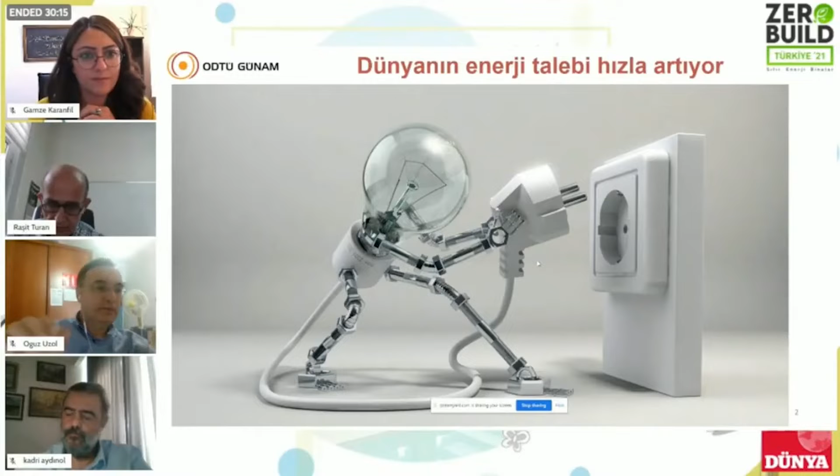The energy demand in Turkey and in the world, and also the supply of that demand. I'll tell you the place of solar energy, and then I'll talk about the technology part following that.

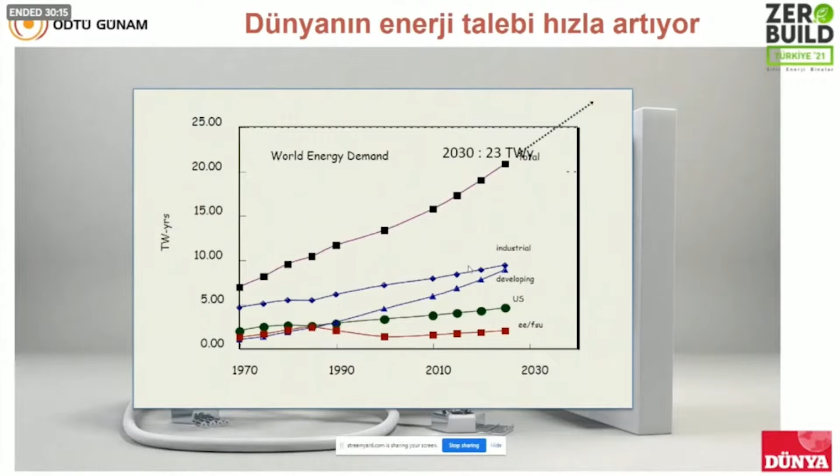The energy demand of the world is ever increasing, and we see that we use more and more energy, more electricity, and we drive more. This increasing energy demand is a problem, and because of it there are many problems: regarding climate, economic problems, and also issues about the future, peace, and the existence of the world.

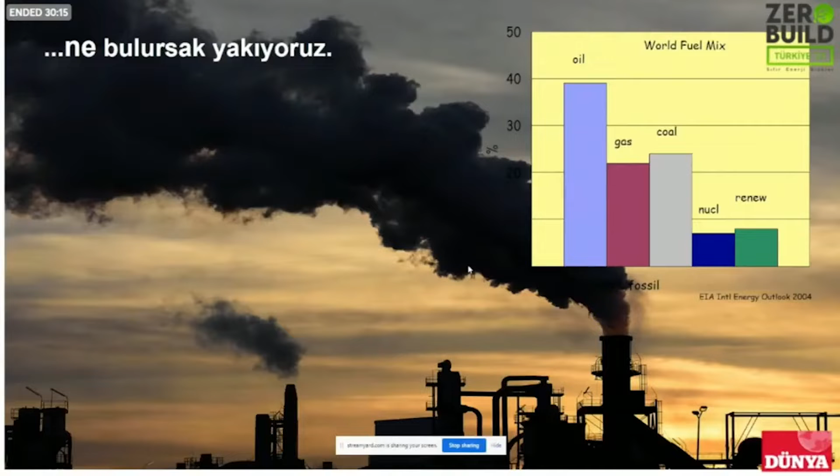There are a lot of problems in this regard, and I'd like to touch upon some of these. The world actually covers its energy demand through fossil fuels. As you can see on the right-hand side, there is petrol, oil, gas, and coal. They cover 80% of the energy demand of the world, and of course there is a need for, and an increasing use of, renewable energy resources.

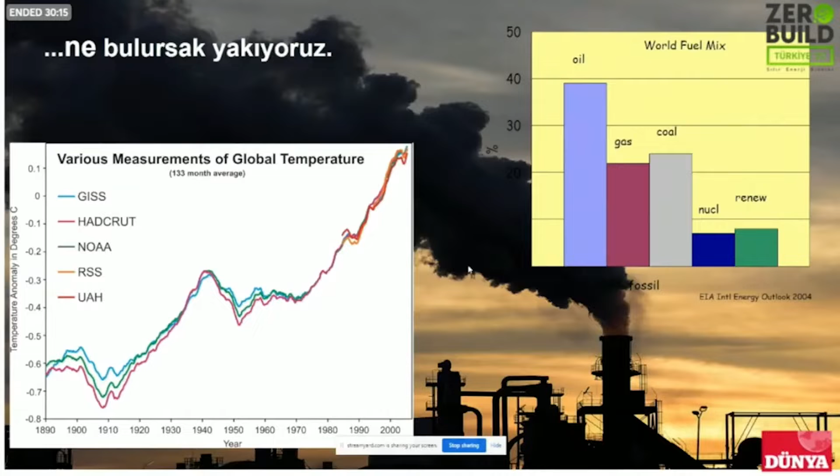Drought and aridity is something that awaits us, and for our country there is a huge danger of drought.

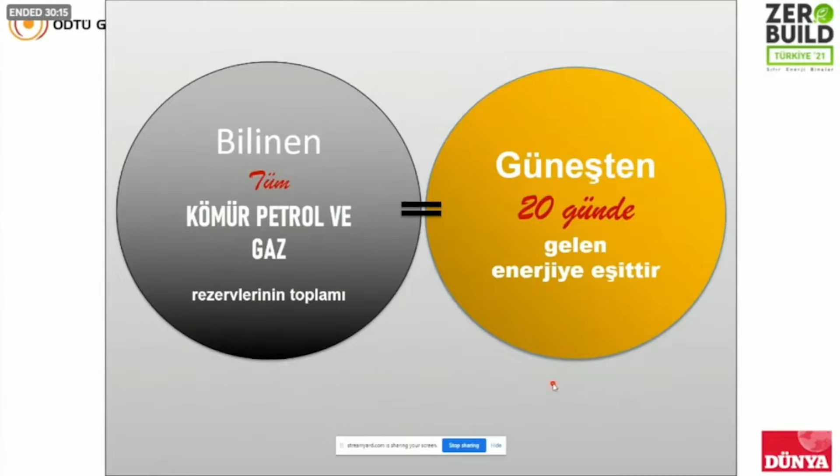So this is a very good analogy. All the coal, oil, and gas total is equal to 20 days of sun rays coming from the sun. So we can say that the sun, solar energy, is a clean and infinite energy.

When we say energy, what we have to think of is the cost of electricity energy, because for all the sectors this is the main parameter. It is the energy cost. We say it is a levelized cost of electricity in terms of electricity.

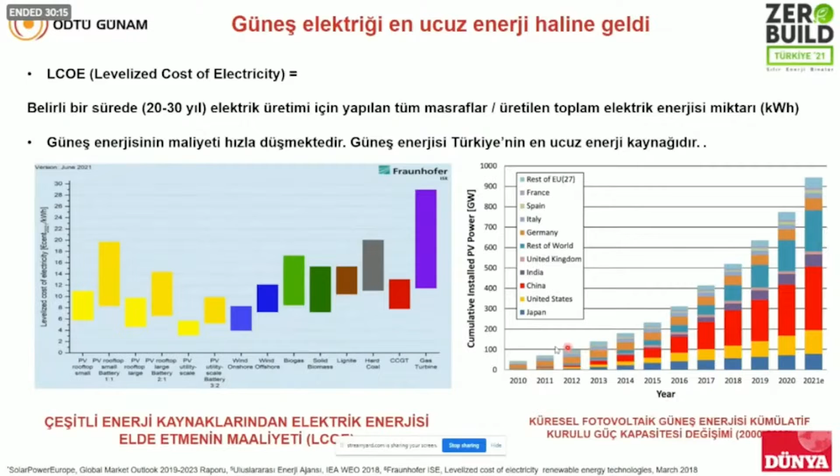The solar energy is a very cheap energy, as you can see from another indicator. In the international markets, there are tenders, international tenders. One was conducted in 2021 in Saudi Arabia. Saudi Arabia's second PV tender drew a world record low bid of 1 cent per kilowatt hour. It's a very low cost, almost free of charge right now.

And in Turkey, last year, a few months ago, there was a new tender and the price was 2 cents per kilowatt hour. To make a comparison, for the Akkuyu nuclear power plant it is 12 cents, so we can say 6 folds of the figure that you see here, and this is going to be paid for 15 years.

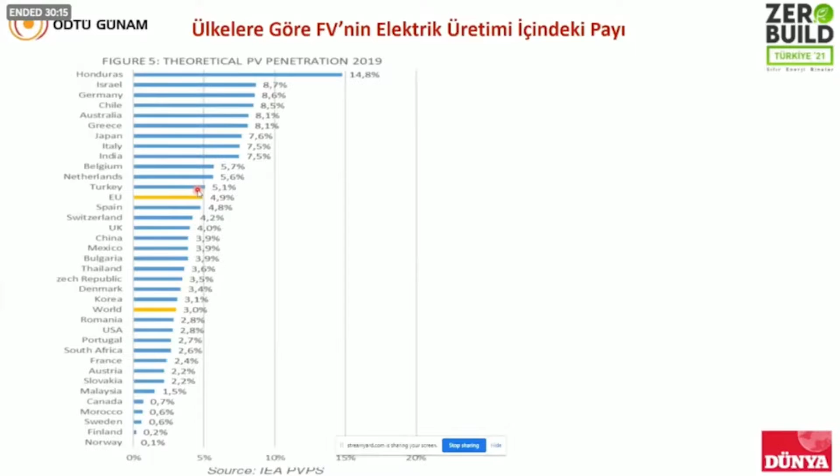It is now 5.1% in Turkey for solar energy, for the solar energy cost. The total PV photovoltaic capacity is 7,300 megawatts, and we can say that it means 11.7 terawatt hours per year. We can say it is 4% among all the other costs of energy.

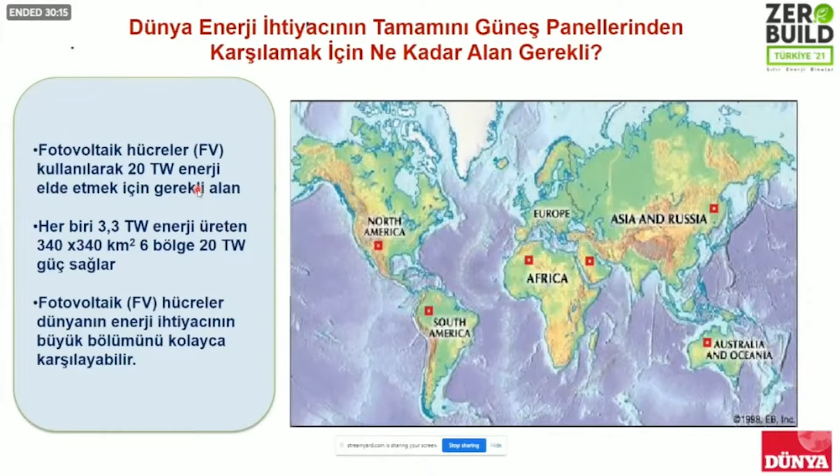In Turkey and in the world, when we make a calculation, covering such a land, you can produce all the electricity energy demand of Turkey with the power plants installed. So we can say the area is not as large as you think, and of course the roofs have a potential - coating these roofs will create an important potential.

So we can say that solar energy is clean, infinite, motionless, silent, not owned by anyone, and accessible, flexible, and a cheap alternative. We believe there are some observations about this solar energy, that it will be an important energy type, and it will increase. It is on the increase, and it will increase even more and increase its share even more.

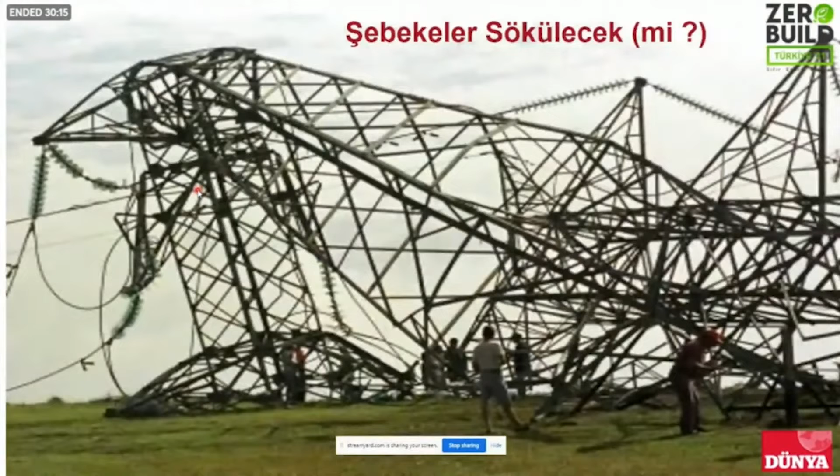As a result, the grids and the networks will be eliminated in the future. There will not be huge grids and networks.

So there will be for small communities, we will use smaller ones, and this is an important advantage. We don't have to transport energy from one place to another. So in the speeches, there were some speeches about the sun, solar energy, wind energy, and the storage of this. When you gather these together, you don't have to have big dams actually.

Ahmet Zaki Yamani, he was a very popular minister. I'd like to quote from him: 'The stone age did not end for lack of stone. The oil age will end long before the world runs out of oil.' This is a saying from years ago, and it's about how we can expect that oil wells will be closed because of lack of demand in the future.

We don't think this is a dream, and of course the European Union and the developed countries - when you look at the Paris Convention and similar applications, there is progress in this regard, and in the European Union and other countries, the use of fossil fuels decreases. For example, the European Union by 2030 will close down all the coal power plants. So I'll talk about economy and politics, and I'll talk about the technology.

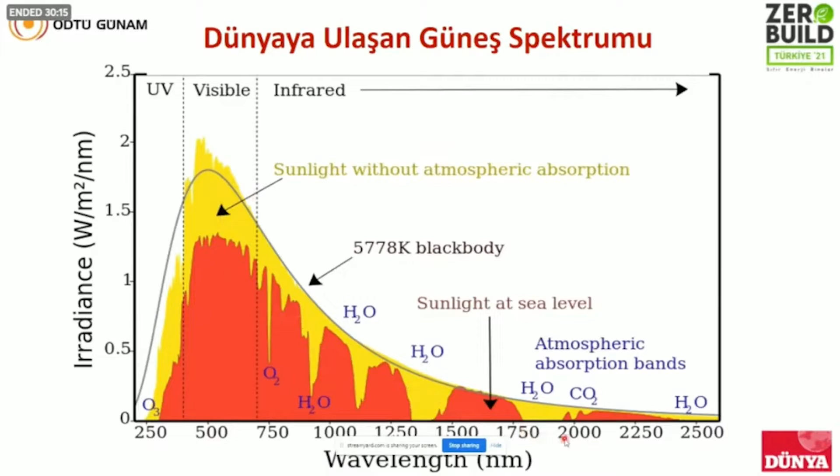You can use photovoltaic systems, as you can see, or you can see focused heat solar systems. There are two systems that you can have electricity out of solar energy: parabolic ones or tower type ones. In photovoltaics, there are some applications, and there are flexible applications as well.

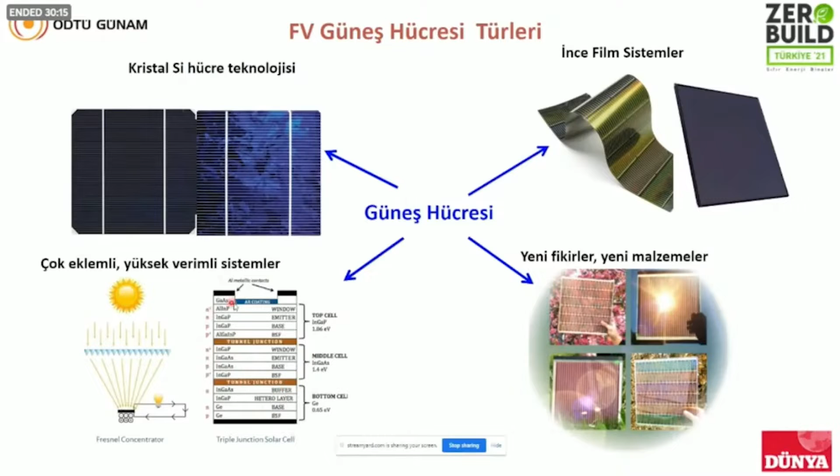When you look at the photovoltaic systems, there are different technologies, and there are 4 main areas. We see crystal ones, and you can see the other ones, and this goes up to 40%. It increases, and there are new opinions. When you look at the market share, you can see crystal silicon, and it says it is more than 95% - it is written wrong here.

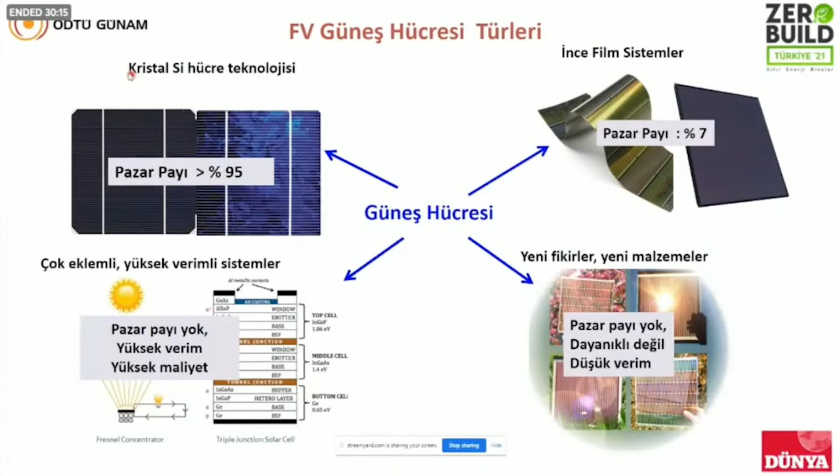The others are more efficient, but they don't have a huge market share because of the cost. The cost is a very important factor here for crystal silicium technologies. We can say that it covers all of the markets right now in the world, and in Turkey the panels used come from crystal silicium materials.

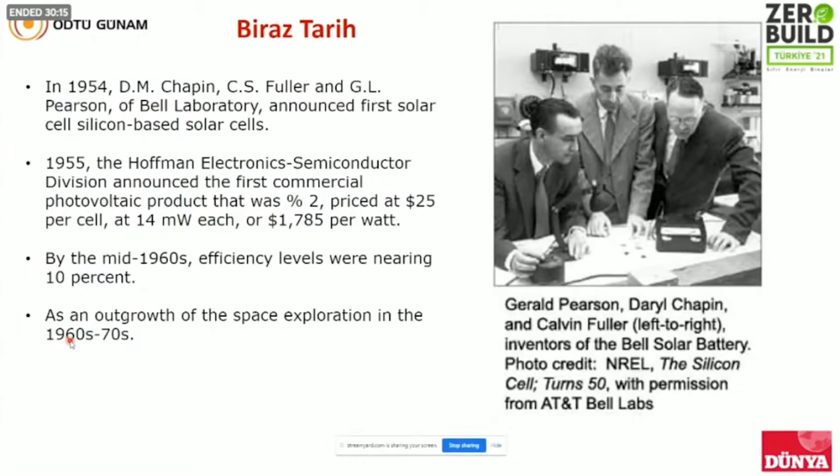In 1954, this was first found at Bell Laboratories. And when it was first found out, the efficiency was 2%, and it was priced very high. However, it started being used with satellites in space, and it's also an outgrowth of space exploration in the upcoming years.

A photovoltaic cell, a solar cell, is actually different from other energy producers because it doesn't have a mobility structure - it is a stationary structure in a plate. You can use a part of this for different electronic properties, and the other part for different properties and characteristics. The electrons absorb the energy and they turn. It's like water coming from a dam, pumped to one part, and it flows out, and here there is electricity current.

We call it a photovoltaic solar cell. You see a cell produced - they are 0.5 to 1 volt current, and you can gather as many as possible, and you can have large or small scale plants. It is a motionless and silent system, and it is differentiated from the other energy resources.

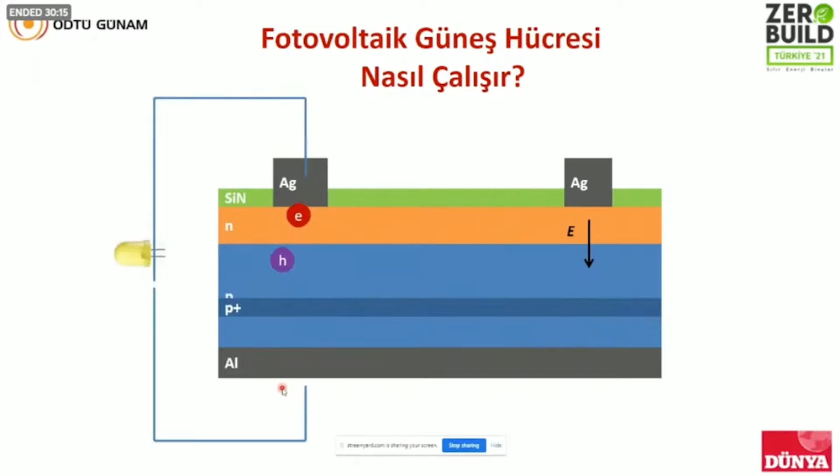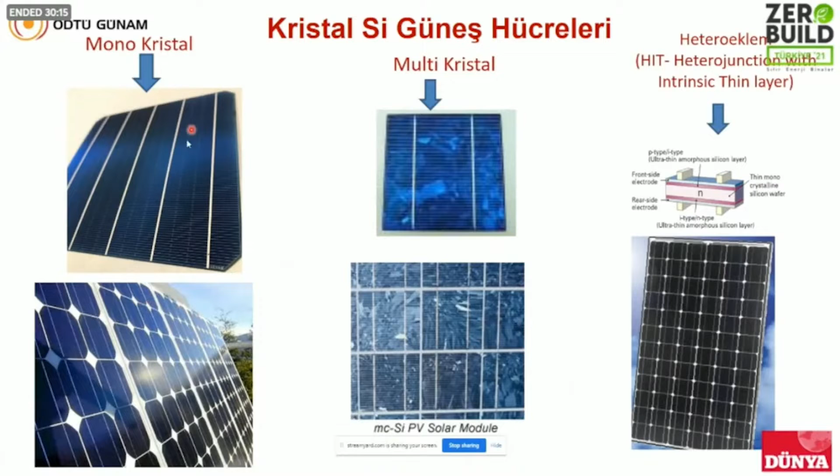Electrons are on one side, and they are the outflow of the material. There are crystal silicium solar cells - monocrystal, multicrystal, and heterojunction. I don't want to go into details, but some of them are more efficient, and there are different technologies and different aspects. In the films, for example, they can be transparent, and in terms of construction technologies, there could be some interesting applications.

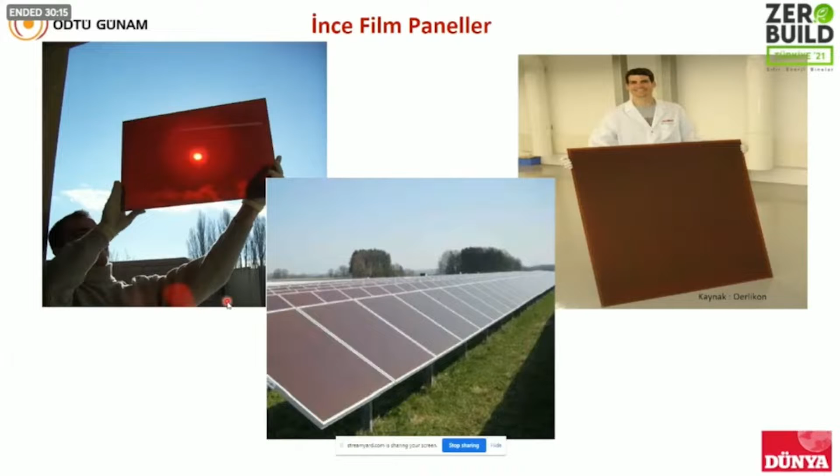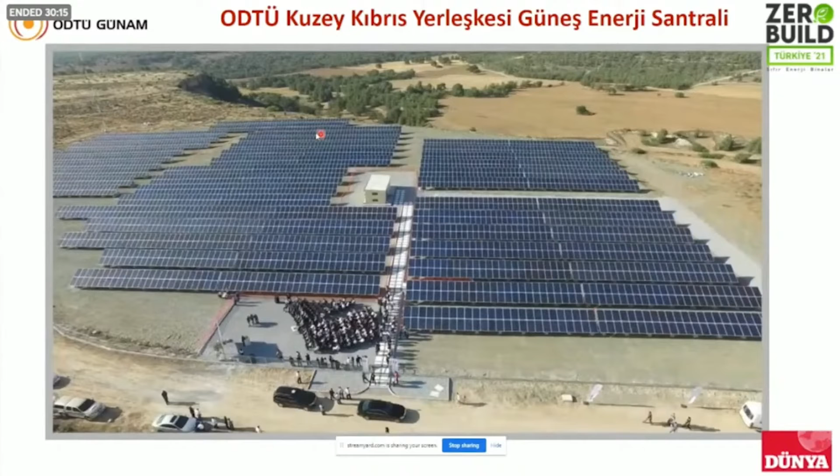So I'll talk about GÜNAM.

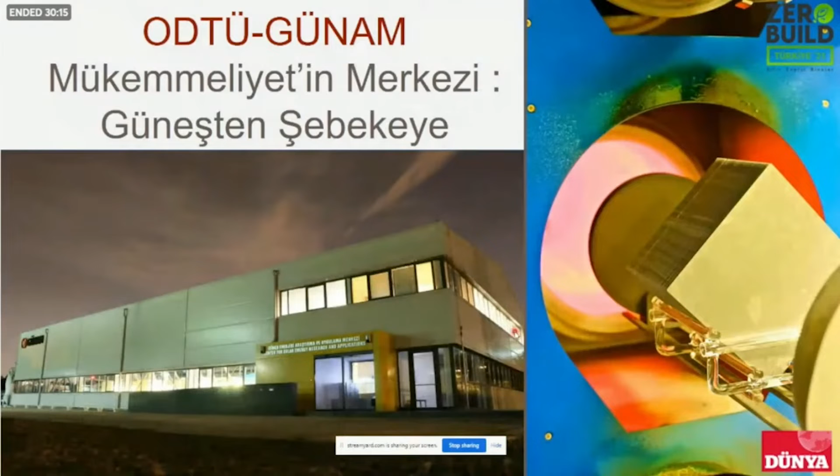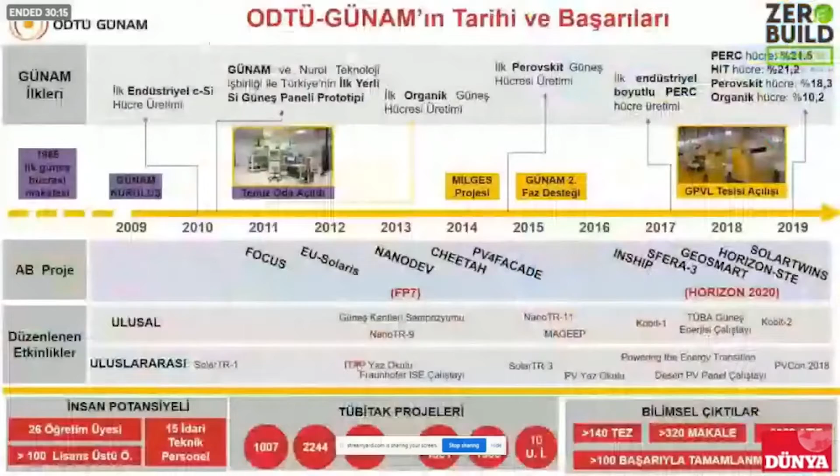It's the center of excellence, and it turns solar energy into electric energy and heat. Here in 2009, it was officially established.

With different periods, it received support from different parts. We first took it from the DPT State Planning Organization, from the Ministry of Development. There are many European projects, and there are national and international projects.

Since 2021, it will be separated from the university, so it will graduate from university, if I might say so, and it will be an autonomous research center under the state.

Of course, there are some objectives, and these objectives are very assertive. Once the objective is met, it will be one of the few prominent research centers in the world. This is a new logo that we defined as a result of a competition.

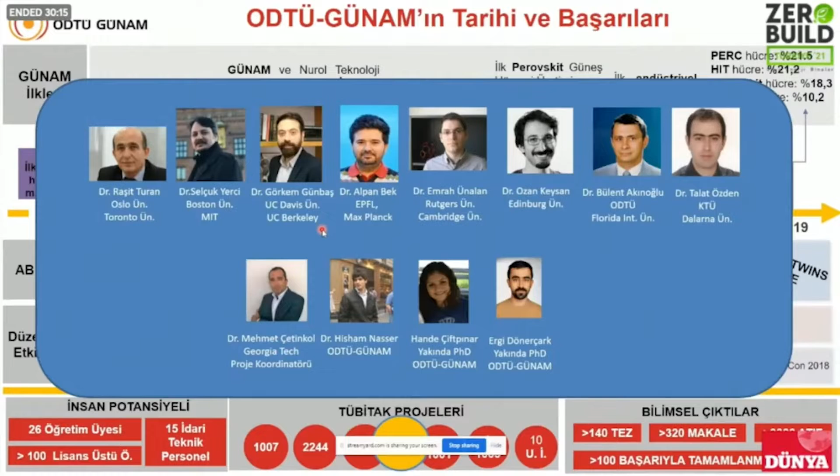We have very bright academicians, people who had their doctorates in different PhDs from different prominent universities. Some of them are full-time, some spend time in university and some spend their time with us. We have many students supporting our active studies.

As you can see, this is the Günam building. It's an operational, active building in use. There's industrial research here, and as you can see on the left-hand side of the campus, it's one of the pioneer studies.

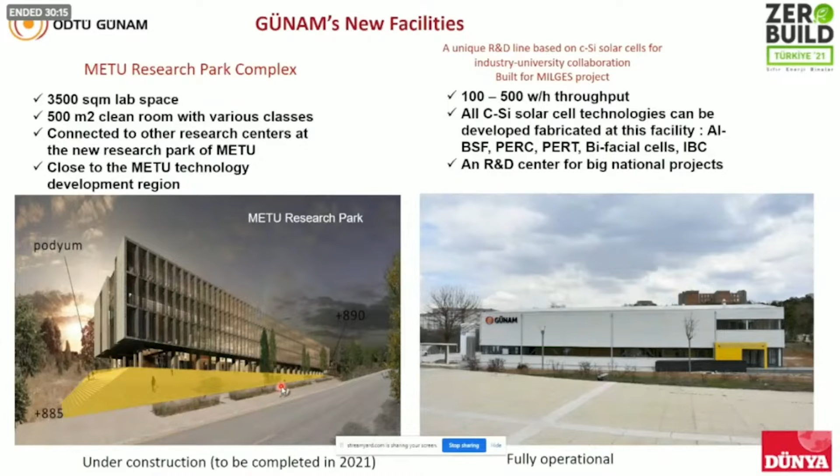It's the METU Research Park Complex, and in one wing of this building the Günam will be there, but the building has not been completed yet. It will be completed by the end of this year, as we expect.

You can see the building, the operational building right now. It's like a pilot manufacturing facility. We have machines which can create solar cells, smaller than the plants, but it's a facility with the right qualifications.

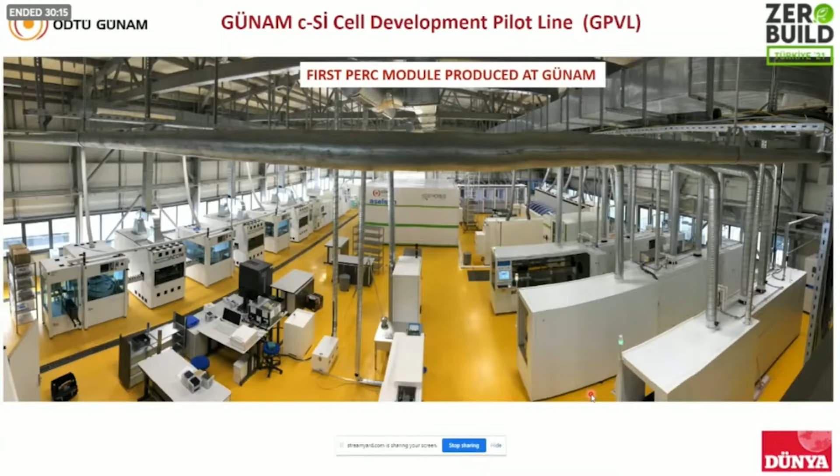We have 6 units, and this is all from my side. I think I had 24 minutes of time, and I have completed the time given to me. If there are questions, I'd be happy to take them and try to answer.

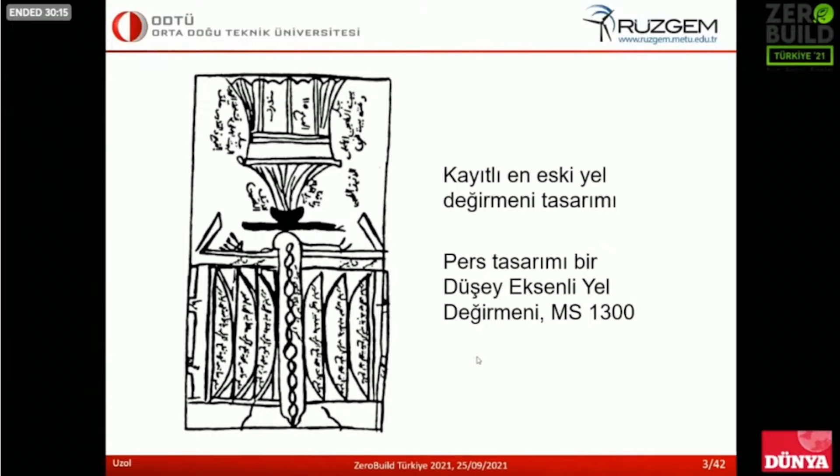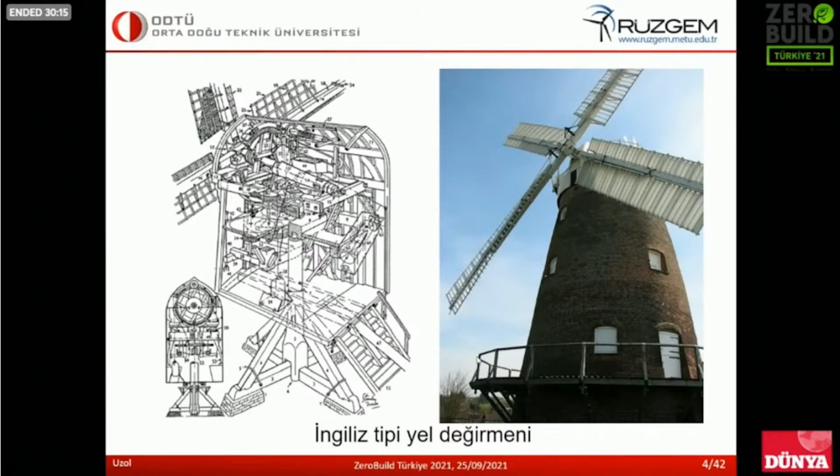It is not a new idea that wind energy is used for people. At that time we had, for example, agricultural activities carried out by windmills, and it was introduced to Europe thanks to science and technology developments. This design was considerably improved, so it was used not only for grinding but also for water purposes.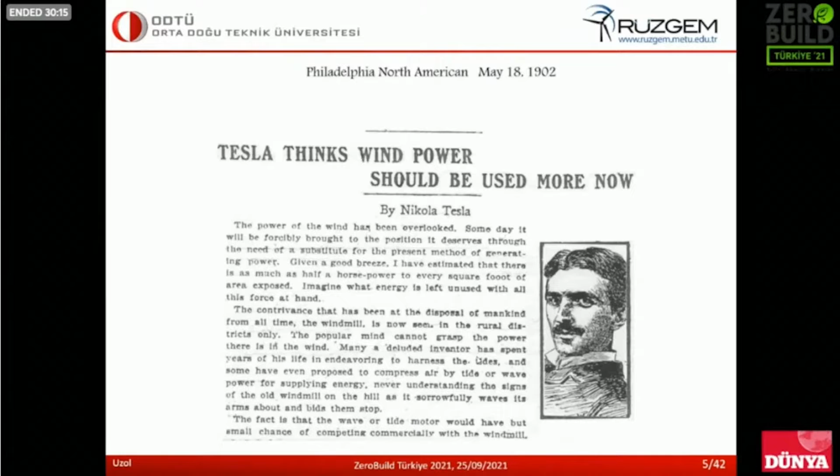As a result of the discovery of electricity, some people discussed whether wind power should be used more for electricity generation, because electricity was quite new at that time. He wrote an article to defend and promote the use of wind for electricity production and generation.

In order to use it efficiently, we need to understand its basis and fundamentals clearly, and the power that comes from the wind is important. There were some experiments, and as a result, three main outcomes were found.

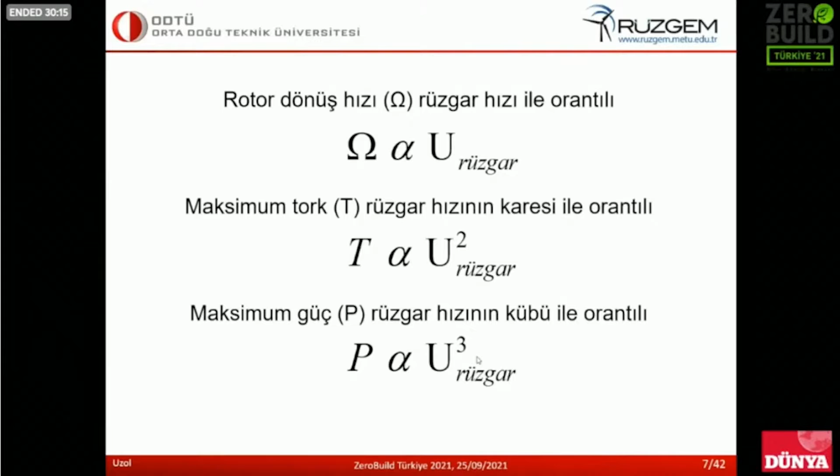Since electricity was discovered in the early 1880s, the wind turbine used to generate electricity is shown on the screen, and it generated 12 kilowatts in 1888 in Cleveland, Ohio.

Today, of course, over the years there has been an immense change and development. From the early 20th century to the 1990s, there were lots of developments in this field. In order to clarify megawatts and kilowatts, I will talk about this later, but it was not cost-efficient until the 1990s. Especially the developments in aerospace technology, generators, and aviation technologies meant that towards the late 1990s, wind turbines became cost-efficient systems.

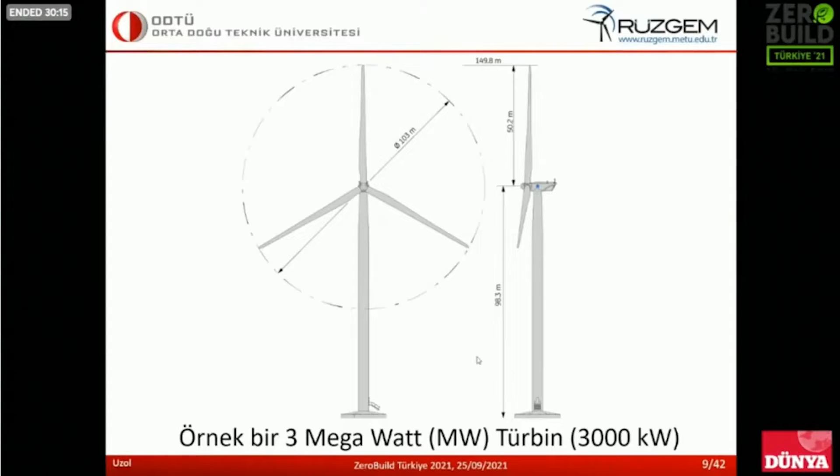They became attractive investment fields for investors. As you see on the screen, this is a wind turbine that generates 3 megawatts, that means 3,000 kilowatts. Looking at its size on power plants on the surface, we do not call it a fan, we call it a rotor, and it is 103 meters, with a height of about 150 meters.

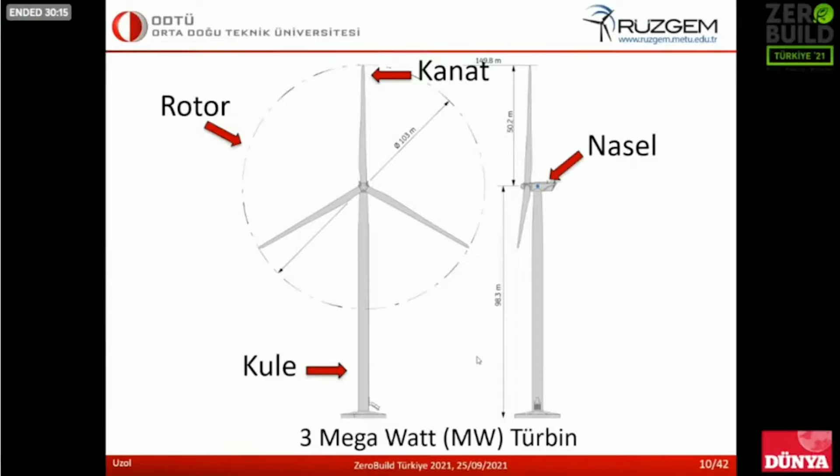When we look at this, we have the rotor, the wing, and this nacelle, which has the electronic systems and the motor. In order to get an idea about its height and size, the Atakule, which is one of the symbols of Ankara that those living in Ankara will easily notice, is 125 meters. So the wind turbine is such a big structure and construction.

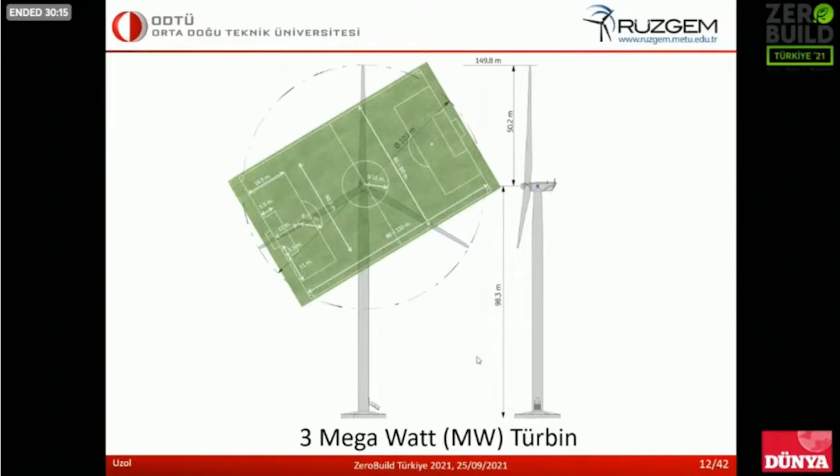It is 150 meters. Next time when you see the Atakule, you will get an idea about the size. As I said, these 3,000 kilowatt turbines are not the biggest, because there are bigger wind turbines, especially those mounted on seas, and we have big turbines there.

For example, this one is a wind turbine that generates 6 megawatts. As you see, there is a plane, the biggest plane in the world, and you can get an idea about its diameter. It is an Airbus A380, and even the biggest airplane in the world can pass through its diameter.

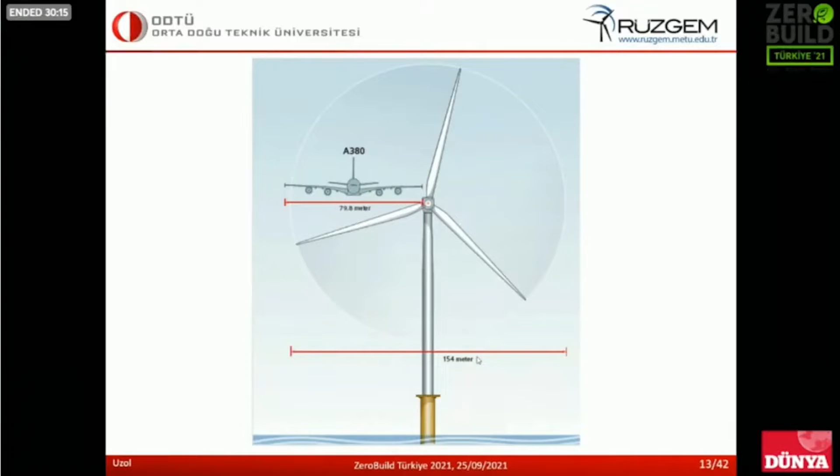Why is this important? Because in the design of wind turbines we face many problems as a result of this size. We have many wind turbines, and also it's the power plant. Next time when you see another wind turbine, try to follow the wing with your eyes, and you will realize you will have difficulty.

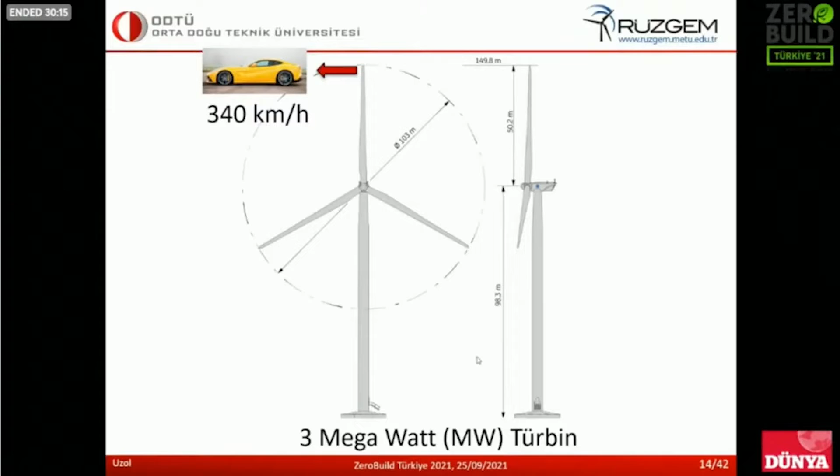Although it seems slow, it is not, because its speed is 340 kilometers per hour. Even though it revolves in what looks like slow motion, it is too fast for us. All wind turbine elements are connected to each other, and I will talk about some other elements later. So far, these are 3 megawatt wind turbines.

But what does it mean for electricity generation? How does it generate electricity? It continuously revolves, and let's assume it works at full capacity for a year; it has a potential of 26,280,000 kilowatt hours. This is not large compared to electricity power plants, but of course there is no wind on some days, and there are changes according to the seasons, with fluctuations.

So in the worst case scenario, we estimate it works at 30% capacity. That means this turbine generates 7.8 million kilowatt hours. Okay, it generates, but what does it mean in our daily life?

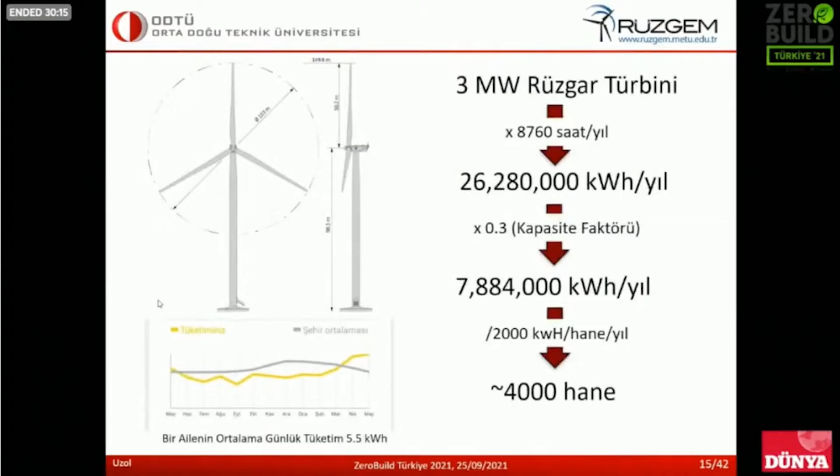A nuclear family consumes about 5 kilowatt hours, and if we calculate it over 365 days, a typical family consumes 2,000 kilowatt hours per year. That means 4000 houses will use this capacity. It's a rough estimation, because for actual investment, there is need for detailed estimation and calculation.

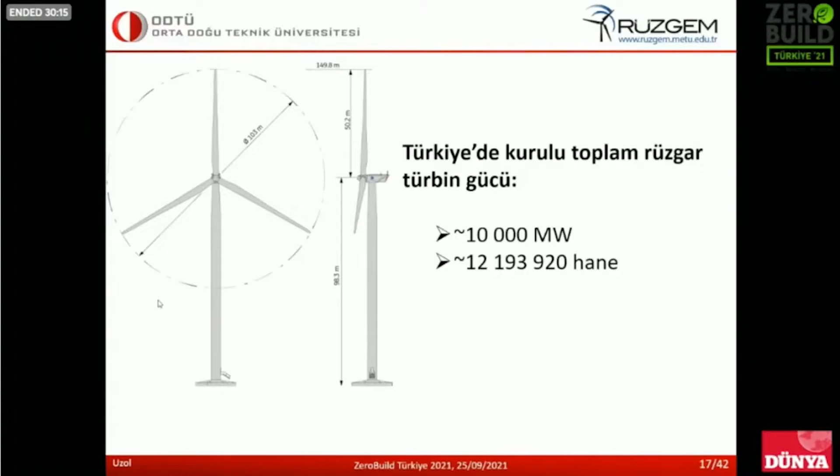And what about the situation in Turkey? We have 10,000 megawatts. A few weeks ago we reached this 10,000 threshold, which is very important. There is a new plant in the far east of Turkey, in the city of Van, and now the total capacity is 10,000 megawatts, equal to 10% of electricity generation. The wind turbines contribute about 10% of total electricity production, meaning about 12 million houses can use this capacity.

You can see the development over the years all over the world, from 2001 to 2020. We see the curve, and the bars in green show the total power, total capacity of the wind turbines. On the right hand we see 743, and the difference between this amount and the total, and the blue part shows the wind turbine power plants on the seas.

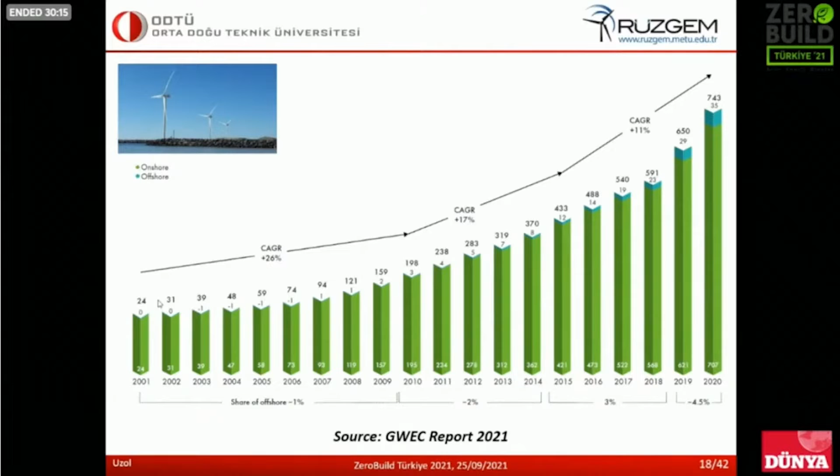What we see is that during the last 15 years, according to research and several projects in the United States, the EU, and Far East projects, this technology has developed a lot. That means these power plants on the seas become cost efficient, and there will be an acceleration in this type of power plant.

What we see is that for a decade, from 2010 to 2020, there is this curve for 27 EU countries, and we have this capacity. The blue one shows the wind, and the yellow one, in dots, is the sun. While the trend of wind turbines and solar power was not so high before, what we see is that they are making progress and gaining more space.

According to this chart, what we see is that as of 2020, for the first time in history, renewable energy capacity is more than the amount of fossil fuel energy.

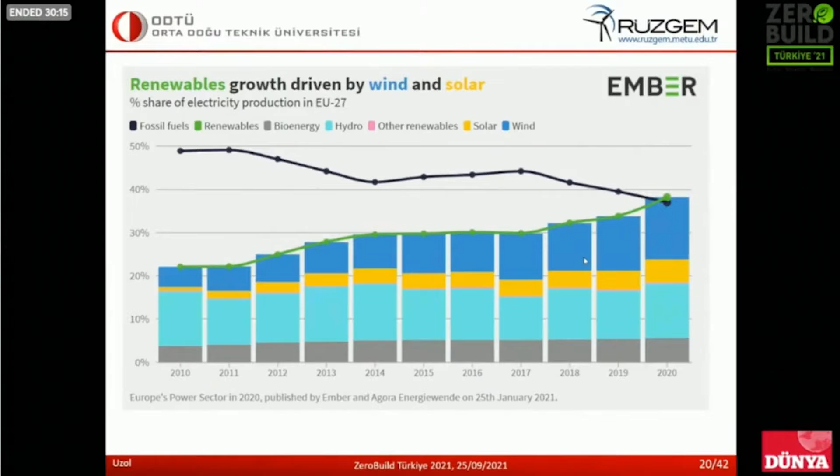And when we talk about renewables, I refer to solar energy and also wind turbines, and this is the wind energy atlas. We have mainly the Aegean part, the northern Aegean Sea region, and also the Marmara region, which are the areas with high potential here.

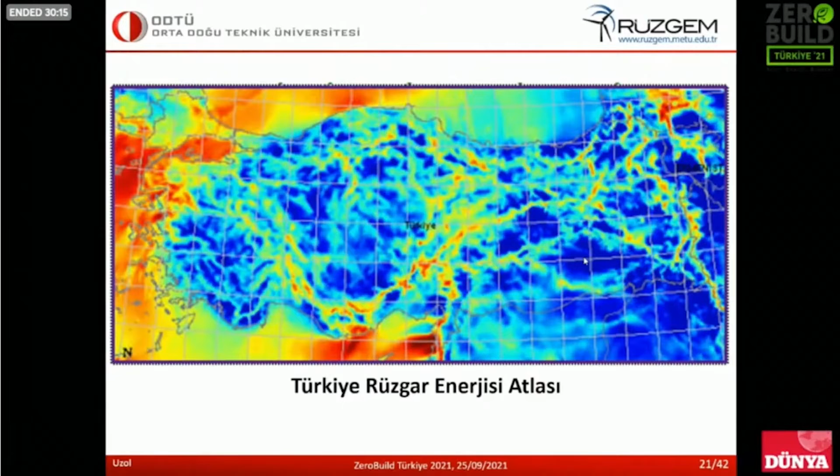Also in central Anatolia, we have some parts with high capacity, especially since the mid 2000s. The first wind turbine was established in Alacati in 1998, and since then we have established many other wind turbines.

So let's talk about the technological part. The wind turbine generates power. In the beginning of my presentation, I said in the 1700s there were some experiments, and the electricity generated by the wind turbine is equal to the cube of the wind speed.

What we see is that the left side shows the power that you generate, in kilowatts, etc. The right part shows how you generate this energy. There are some other parameters, for example this parameter called rho that shows density. And this rotor part, which we call the rotor, shows its square meter area.

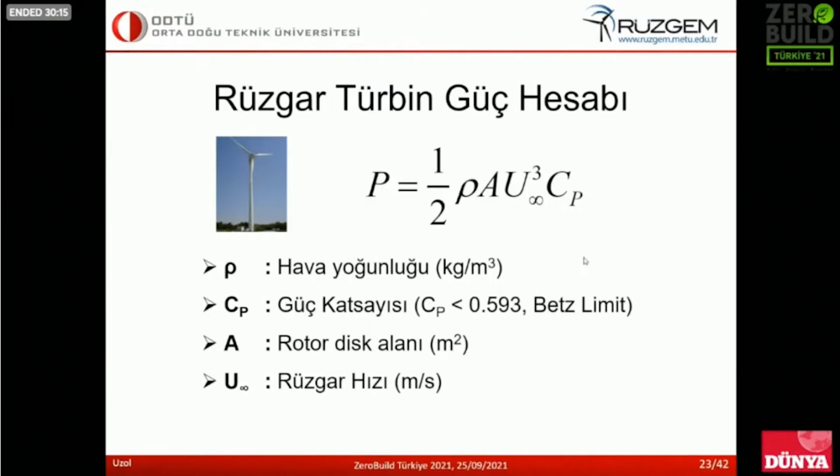We also have wind speed, and the coefficient cannot be more than 0.593. So density is important, and we know that the wind is dense, especially over the seas. The rotor area and the higher diameter mean more energy is generated, and the wind speed is also important. For example, if the wind speed is doubled, then your energy generation becomes 8 times more.

What we see is the wind speed and also time. X shows the time and Y shows the speed. But is it the real case? Is it the real scenario? Unfortunately, this is not the case.

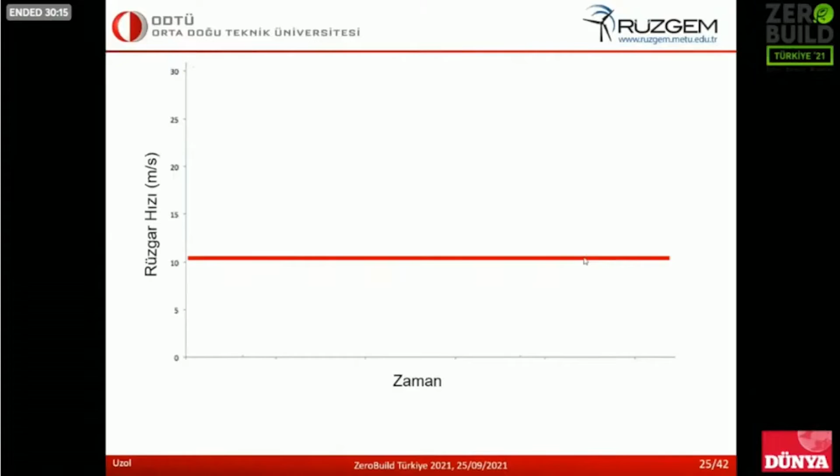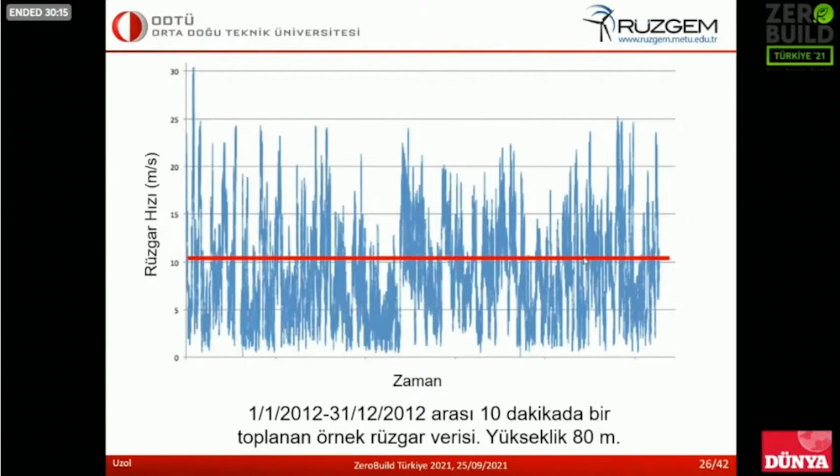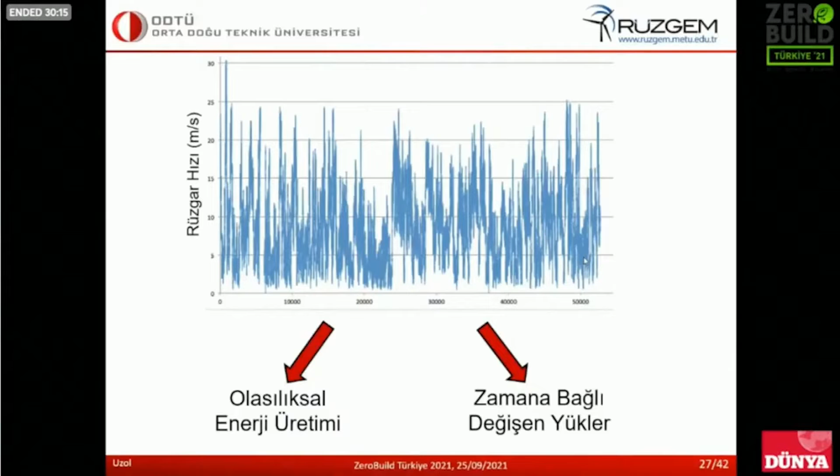So in such a fluctuating wind speed, we need machines that can resist such changes. This causes two types of problems. First, the change in wind power creates difficulties with calculation of potential energy generation. And the design of wind turbines is not an easy task.

It's not just about looking at the winds. Even the wind turbine wing design is difficult because there are shafts, power systems, towers, and also wake turbulence, wind shear, extreme wind—these are the issues. Even for the wings, we work very hard, and there is need for research, tests, and efforts.

We need to find solid and also the cheapest wind turbines, because the wind turbine market, as Professor Rashid stated, is cheap for solar power and there is a cheap price for wind turbines. So it is considerably competitive and costs a lot, and they need to develop technology.

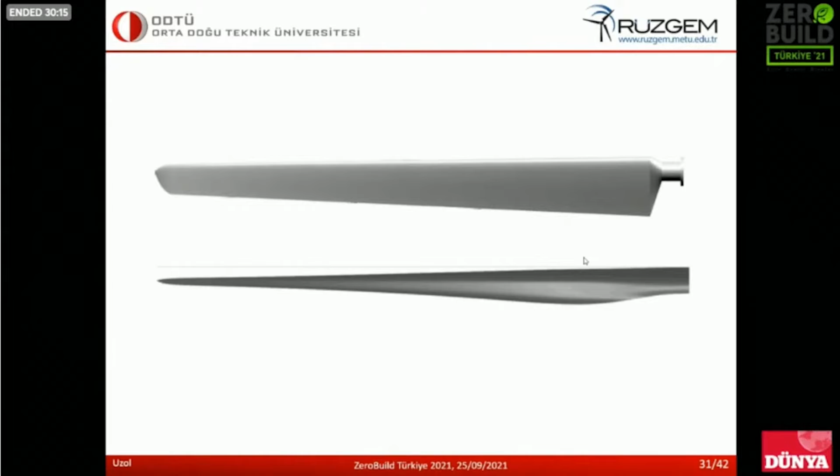In the 80s, if you were manufacturing small size wind turbines, that was the wing design. And if you don't have the technology, and they ask for an order to generate 5,000, not 50, that will be the size of the wing. But is this the case for the real one? No, it looks different. If you order a wing for 5 megawatt energy, it is light and its design is sophisticated.

So in my last few minutes, let me move to the topic of our research center, RÜZGEM. Like in the case of GÜNAM, it was established with the support of the state, and it is our 10th year now, our 10th anniversary. We are working very hard, and we still get support from the state, from the government.

We have three main areas. We work on wind potentiality and airflow over topography, wind turbine technologies, and also socioeconomic impacts. All these issues are our topics, and as in all other engineering cases, we have groups that cover these issues.

We have three main objectives. We aim to provide services to the community as regards to research and development tasks, training services. We also aim to train human resources and capacity, and raise awareness about all these issues.

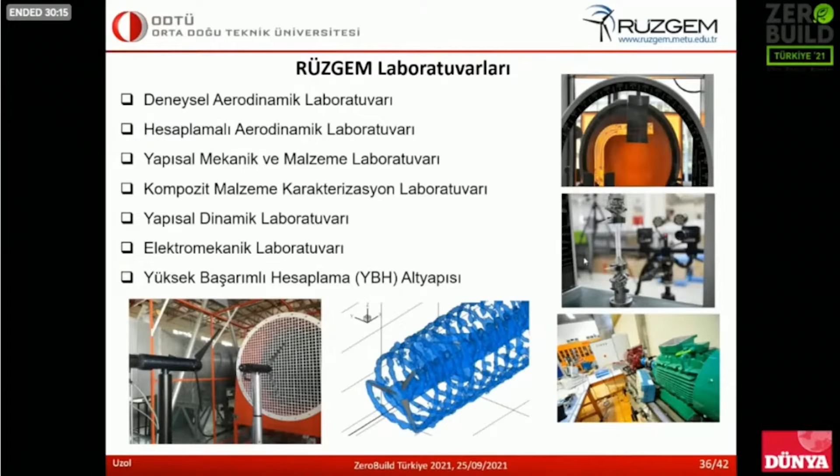As I said, we were established back in 2011. All relevant units supported us at that time, and we have become one of the well-respected research centers in Europe. Of course, this state planning system—its title has changed now. It has become the Presidential Office Planning System Office, Presidential Office Planning Bureau.

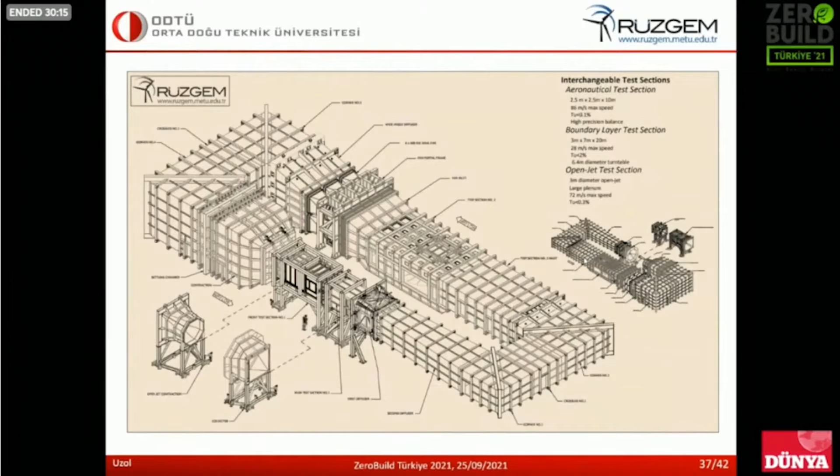These infrastructures—we are working on the wind tunnels. It is one of the biggest tunnels in Turkey. We began working in 2014, 2015, worked on the design phase, then moved to the public bid phase, and it was constructed until around 2019-2020, and now it serves for testing purposes to the industry since January 2021.

These wind turbines have different testing stages. It is not only the wind turbine sector, but also several other sectors that need these testing services—this is why and how we designed it. So far, we have worked with many defense industry companies, especially wind turbine manufacturers who join us, and also the construction sector uses our center for wind tunnel testing services.

We also need to train staff who are capable of doing everything, and we have MA and PhD students for this program. That's all from my side.

That's the end of my presentation. I'm happy to answer if you have questions.

Thank you. It was a very informative presentation. I took several notes. As I said, we have some questions, but I will ask them later. Now let me move to Mehmet Hoca.

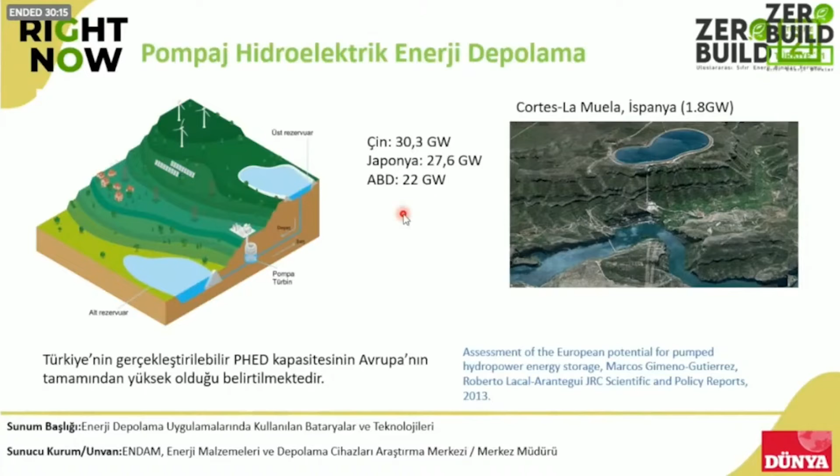And according to current figures, China has an installed capacity of 30 gigawatts. In Japan, we see a similar number, and we see quite a high number in the US. As I said, there is this ongoing initiative in Turkey, and it has an advantage. According to a study, Turkey is said to have a potential for installed capacity of pumped hydroelectricity energy storage which is higher than all of Europe. Our topic is maybe a little different, renewable energy systems, but I wanted to emphasize this potential as well.

When we look at the energy storage technologies, power is a parameter in terms of storage. What power do we need, and for what duration do we need it? We need to ask these questions. And when we look at the practices, we see voltage regulation, frequency regulation, or balancing of power in renewable energies. And here we need durations of minutes and days. The expected powers range from a few kilowatts to gigawatts. So this range is a critical range for us.

When we look at the other areas, we see seasonal durations like 1 month, 2 months, 6 months. If you want to benefit from the energy for that duration, you need different technologies. But as we look at the current ones like super capacitors, flywheels, or batteries, you see batteries within this range covering almost the whole range. Pumped hydro is about a huge lake or reservoir, which will be able to provide you with energy for a longer term. That's why their usage areas are mostly related to seasonal storage.

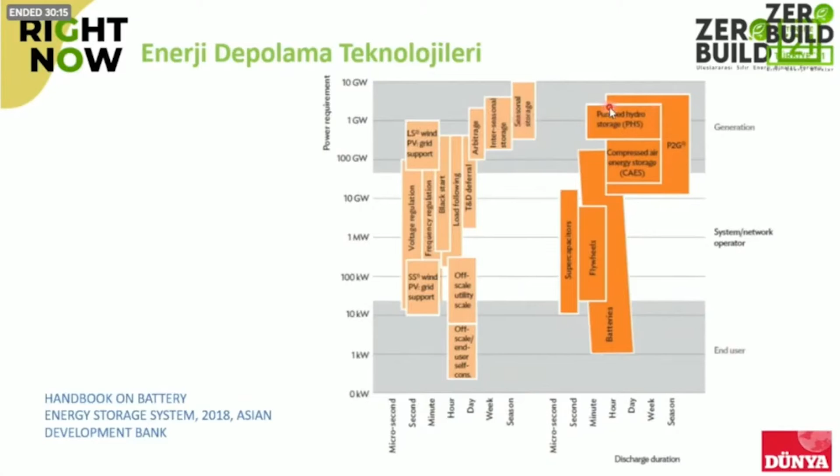And I try to emphasize the batteries with a focus on storage. Zinc-based batteries are one of them. Lead acid batteries also represent an established technology. Lithium batteries cover a huge area, both in terms of rated power and usability. Also, sodium batteries and flow batteries can be briefly mentioned. These batteries are quite conducive in terms of storing renewable energy generation.

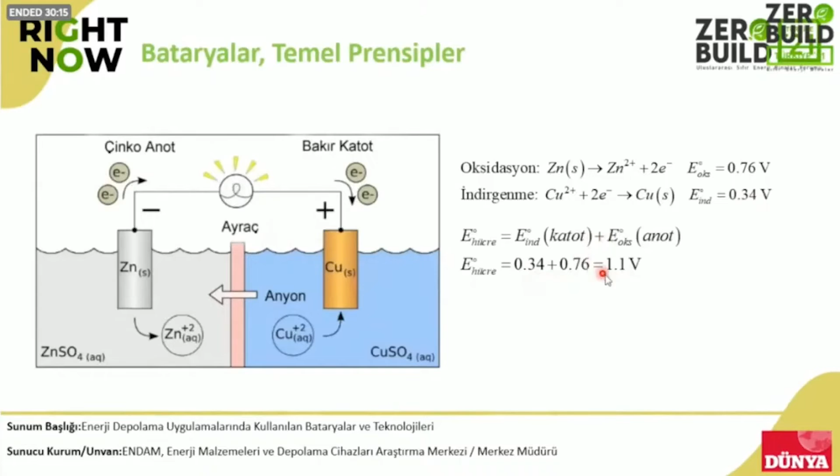These are called redox reactions, and they create potentials with oxidation. These are known constant values under standard circumstances: the oxidation reaction of zinc is 0.76, and that of copper is 0.34. When you add up both of them, you achieve a voltage of 1.1, which has to do with thermodynamics.

Many elements and substances can be used, and you can find all these tables in textbooks in terms of reducibility potentials or reduction potentials. Here you choose a couple of elements. For example, lithium is the most electropositive element, at a very low level, and fluorine has the highest value with 2.87. So if I can produce a lithium and fluorine containing battery, the total size will be 6 volts.

Of course, this is the theoretical side. There are practical difficulties, and the reaction may not take place as expected. But by taking into consideration these reduction or reducibility potentials, you can create many batteries, and dozens of them were produced earlier, as I told.

I showed the important ones. Primary batteries here mean that you can use them only once. You cannot recharge; you just dispose of them. Zinc, carbon, manganese oxide batteries actually have an old history, maybe 100 to 200 years. Manganese oxide isn't used that much, but there's another version of it.

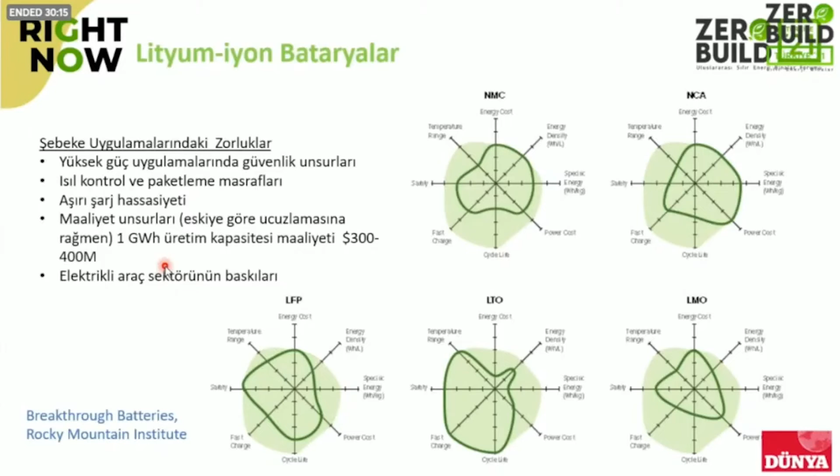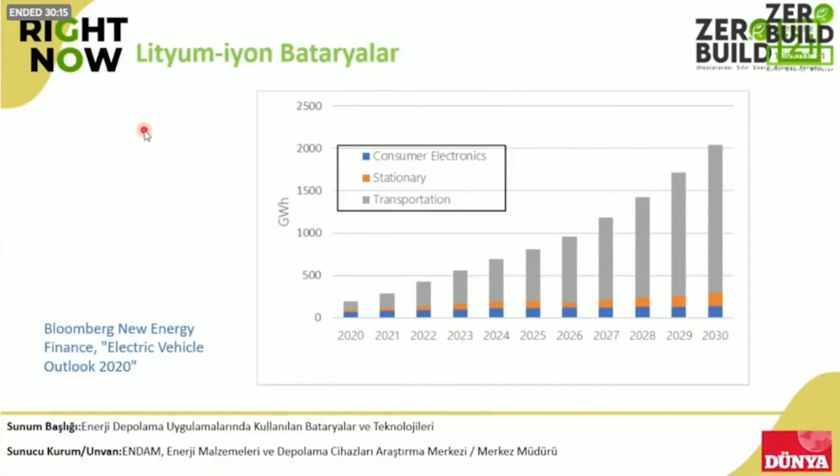It may cause a serious concern because electric cars are arriving. The story starts back in the 1990s, but we also had a buzz in 2010. We see another buzz trend in that development, and now the big manufacturers do not view the issue as continuing to use oil. There is serious, keen interest in batteries and storage, and it is expected that 2 terawatt-hours of energy will be required by electric cars by 2030. How lithium ion will meet these needs, or how the sources in the world will meet those needs, is of course a matter of question.

We see commonplace practices of lithium-ion batteries, as shown in my previous slide, there are significant investments here. Now, the systems used for storage in conventional electricity investments were around 10 megawatts, but we're nearing gigawatt values now with the newer facilities, and lithium is used there.

For example, Tesla has this mega package, with 7,000 units of small batteries, and 142 Tesla mega packages are used. It has a power of 100 megawatts. It's one of the biggest, again in California. It has 1.2 gigawatt-hours of energy and 300 megawatts of installed capacity, one of the biggest in the world.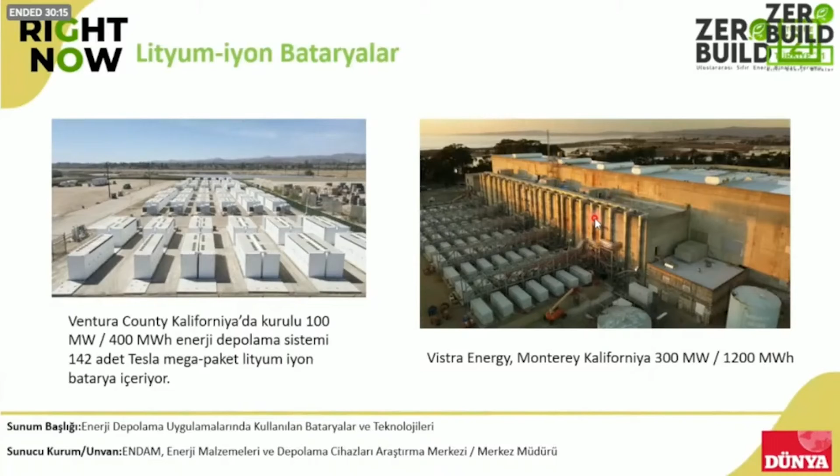China hasn't come to play yet, but it's on the way to establishing the biggest facility with installed capacity. Another example is in Australia, installed by Tesla batteries. This one is a mixed project benefiting from solar, wind, and battery storage.

So lithium-ion batteries are becoming more and more common in all countries. With the maturity of lithium and a high number of manufacturers, things become easier. We do not foresee a very huge bottleneck, but of course we need to make certain predictions for the next 2-3 decades. Another technology is lead acid, a very old but also developed technology.

Unfortunately, lead is heavy and it leads to a low mass energy intensity, around 30 to 40 watt-hours per kilogram. We say that lead is toxic and it harms the environment, but these battery systems can be recycled 100%, even 1 gram does not get mixed into the environment. So it would not be wrong to say that they're environmentally friendly.

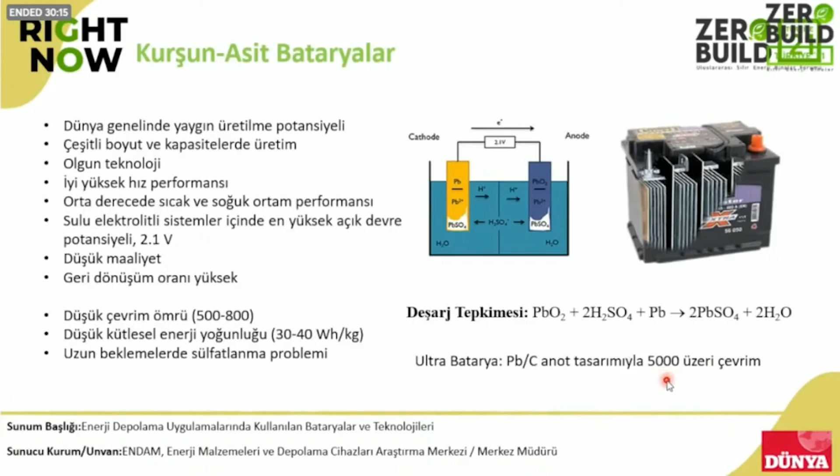An issue though is that they have low cycle life. But now we have an ultra battery where carbon and lead are mixed, and the cycle can go all the way up to 5,000.

In the past, we used to see more examples of lead-based storage systems. That's not the situation today, but there is this 250 kilowatt ultra battery energy storage system in the US. Also, this solar park example in Germany has an installed capacity of 2 megawatt hours. These are all lead-based.

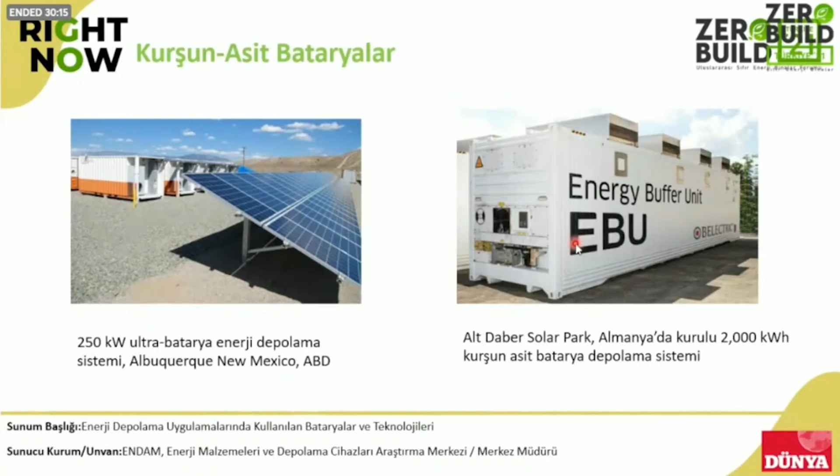It's heavy, but we do not transport it to any other location, so it's not a huge issue. It is not going to be used in vehicles, as they will not be able to carry it, but lead will be quite concentrated here for longer years.

Another battery type is high heat battery: sodium sulfur and sodium nickel chloride systems. These operate at high degrees, between 270 to 350. So all these substances are in molten form, in liquid form.

Sodium operates as anode, and sulfur works as cathode. There's no need to elaborate. It was first developed by Ford, probably with the idea of using it in cars, but it is not that conducive for mobility. However, Japanese NGK commercialized it, and this is the only company producing it in the world.

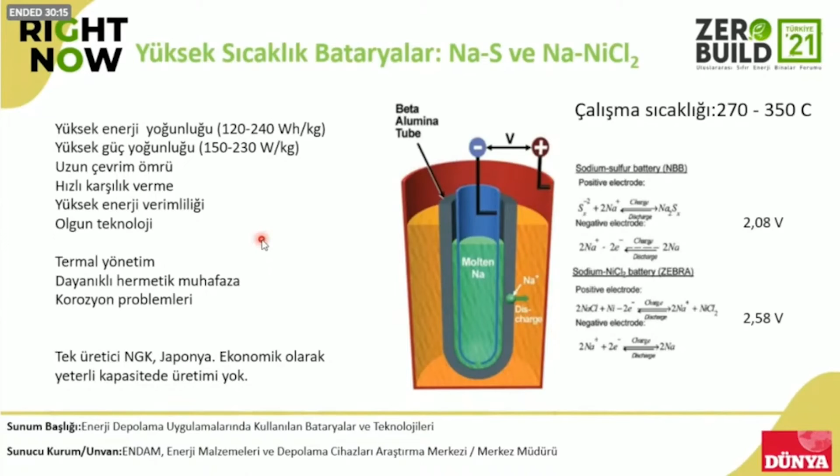One of the most important disadvantages is that it does not provide much of an economic alternative. You cannot make huge investments with only one supplier, and NGK actually installed a few facilities in Japan. As far as I remember, they have an installed capacity of 30 megawatts. They have advantages and disadvantages, but one of the main problems is that there is a single player, and when that is the case, you cannot make your presence felt.

Also, Zebra is another battery module used in South Africa.

But despite their implementation in a few practices, they didn't become commonplace in the world.

Another battery technology is the flow battery. This is quite an interesting system as well. The capacity matters for us, and what determines the battery capacity is the amount of anode and cathode substances and their space filling properties.

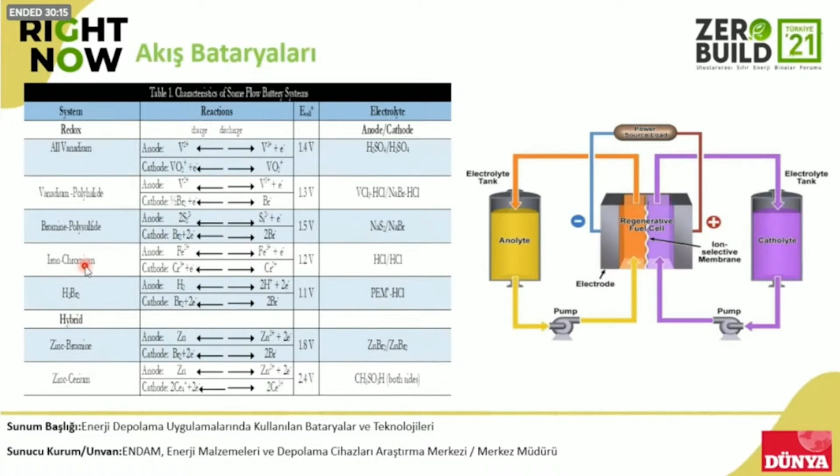Although you have a small cell where the reaction takes place, you can take these liquids through pipes and generate electricity. The liquids should be redox active, and there are quite redox active electrolytes developed around the world. One of them is vanadium, where it has +2 and +3 values, and it's called redox vanadium batteries.

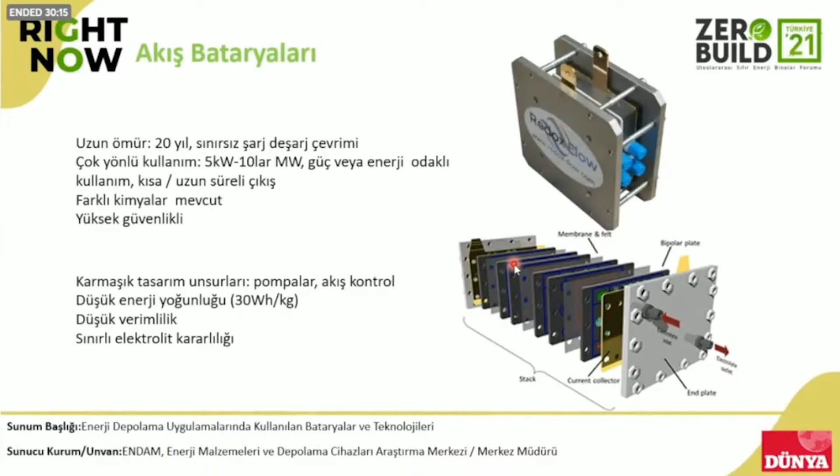Also, zinc bromine and iron chromium are the other two technologies that see serious implementations. Flow batteries can take place in these stacks. Anodes and cathodes can be added to each other, and you can connect these in series. One of the complications is that it has complex design elements. You need pumps, flow controls, and the solutions deployed should be considered in terms of the reaction with the cells.

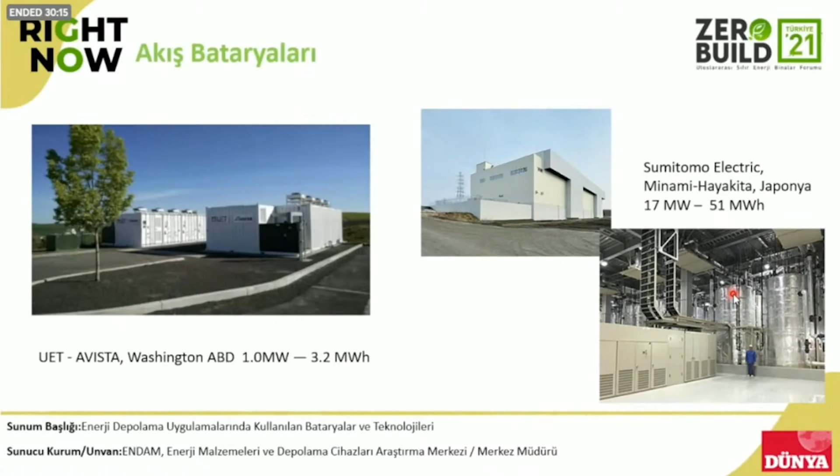Alkali batteries are the ones we already know. These two are not used much, but zinc manganese oxide has an important potential. Actually, it's an old battery type used as a primary battery, but now they've managed to make it rechargeable due to important R&D activities over the past decade. This has a cheap cost, $50 per kilowatt hour.

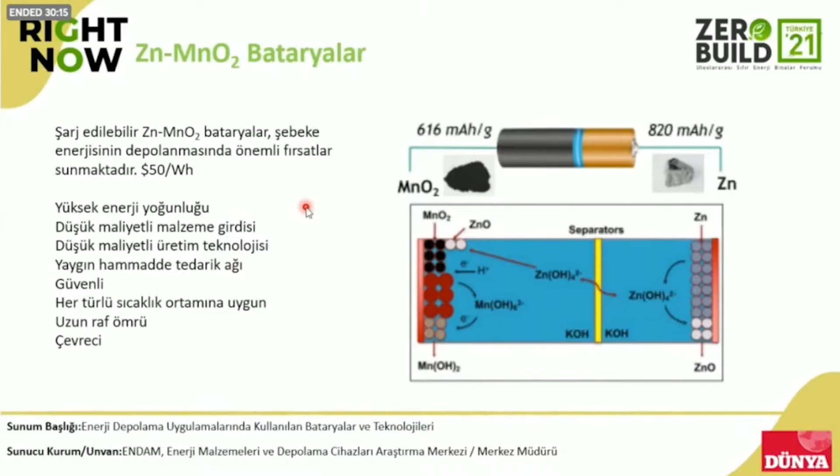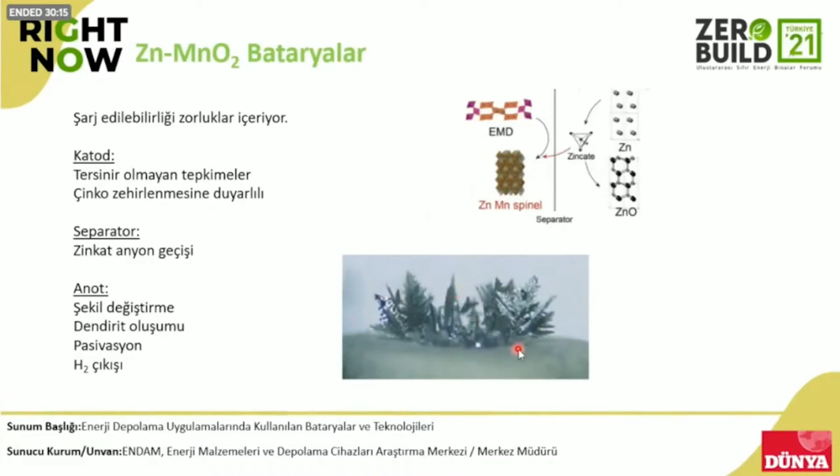However, again, we encounter certain issues here, but with intensive R&D we know we can improve and even eliminate them, and we are working on them as scientists. One of the important problems is that the zinc actually poisons the cathode side, and side products come together, and zinc dendrite formation is another issue. So there are important studies going on to overcome these challenges.

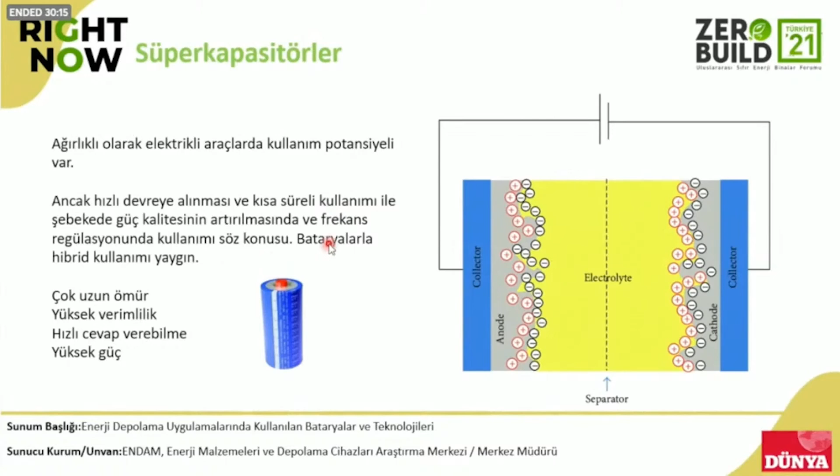Such capacitors are used widely, especially in vehicles, heavy vehicles including trucks and buses, where you need acceleration or increased performance on inclined roads. However, we generally see hybrid applications mostly. There are a few examples where you see batteries and capacitors next to each other. Generally, they do not have high energy intensity, but they have amazing power intensities. That's why when used in hybrid mode, they can present various advantages.

Let me say a few words about ENDAM, our Energy Materials and Storage Research Center. Its roots go back in history, but officially our center was established in 2008, and it is supported by researchers from ODTÜ University and Muğla Sıtkı Koçman University. We try to carry out certain activities focusing on sodium ion batteries, lithium ion batteries, or alkali batteries, because zinc manganese has a significant future.

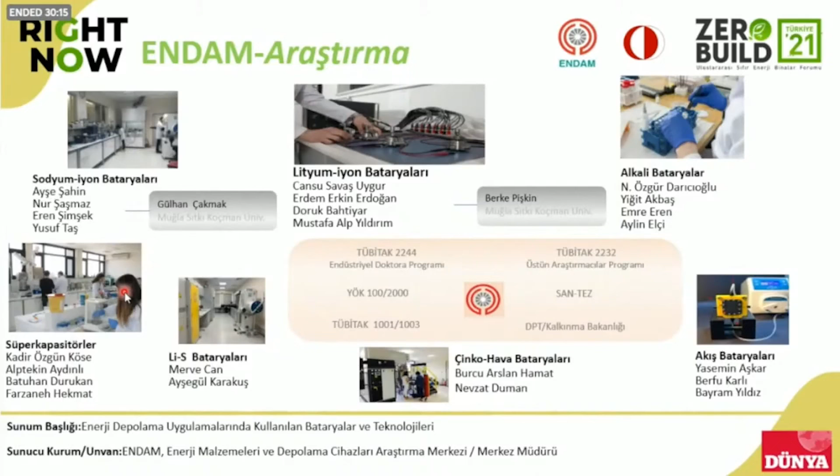Flow batteries, zinc air batteries, lithium sulfur - I didn't refer to that much because it hasn't been realized yet, but they present significant potential. Also, supercapacitors are one of our research areas. We check these substances, experiment, and come up with products. So we help the industry both in terms of active component or material synthesis, tests and characterization, and battery and device production.

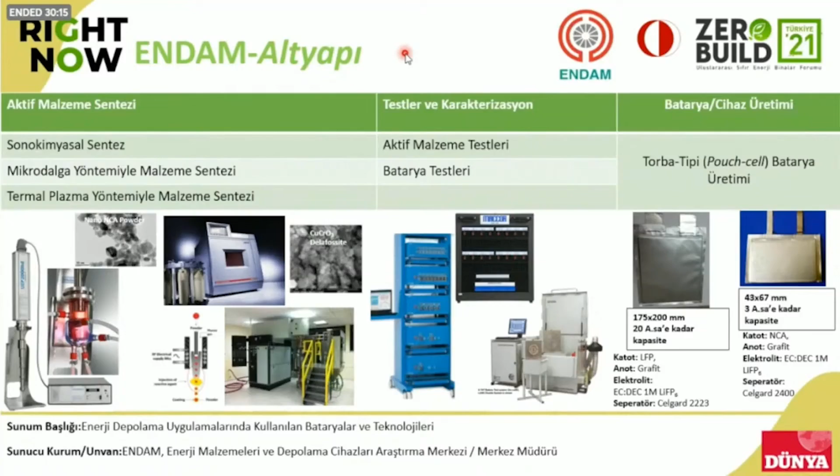We are supported by researchers in academia from different universities. Also, the industry shows keen interest in our activities. As you know, electric cars have been more actively discussed for the last couple of years, and there have been significant investments in Turkey. That's why we position ourselves accordingly, ensuring that researchers and industry people receive our support.

This is one of the main activities of ENDAM, to spread training and science at a grassroots level. That's why we have a symposium under the name of MESKİS, and there is a summer school component of this symposium. We held the 5th occasion of it a couple of weeks ago. Next year it will be in Croatia, in the city of Split, and we enjoy participation not just from Turkey, but also Europe and the world. This enables the training of our young colleagues as an umbrella platform, and our door is open to anyone interested. Thank you very much.